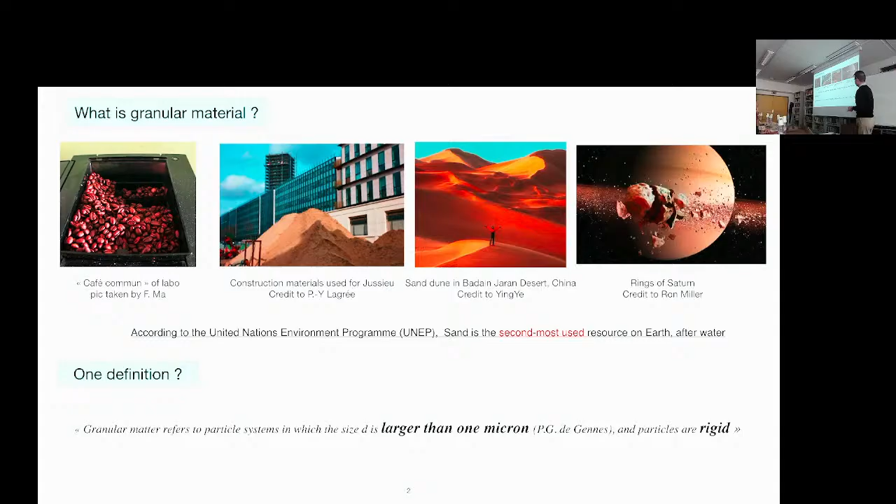Effectively, the interaction of a particle system may depend strongly on the particle size. For particles smaller than 1 micrometer, thermal Brownian motion is pronounced. For larger particles such as powders, clay particles, and flour particles, we have adhesive attractive interactions such as the van der Waals force and electrostatic force. And for even larger particles, as I showed in this picture, we have contact forces such as friction and the repulsive force. And also, we cannot neglect the weight of the particles.

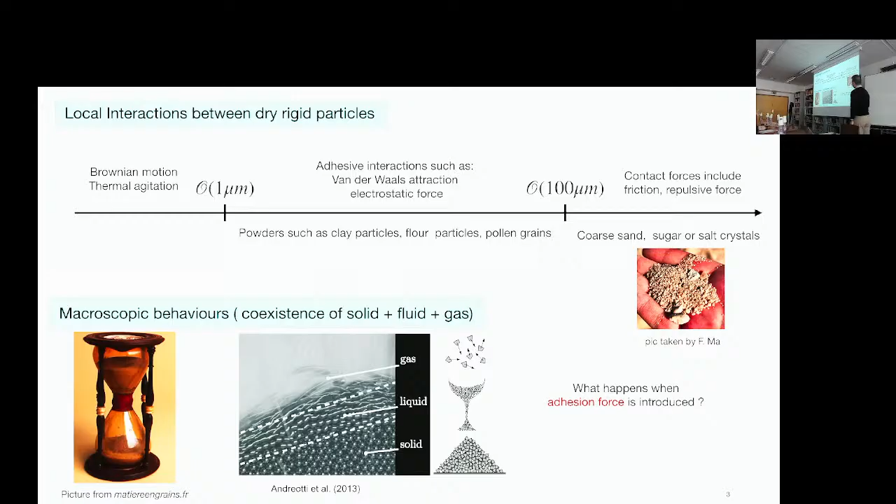In terms of macroscopic behaviors, one important feature of a granular material is that it can flow. It can behave like a solid, gas, or liquid according to the external conditions. Here, I show a very classical example: the flow of beads over an inclined plane, over a sand pile. From the top to the bottom, we can see they behave like a gas, highly agitated; in the middle, they rearrange and move as a liquid; and at the bottom, they form a solid, and the shape doesn't change. Naturally, we can ask the question, what would happen if we introduce the adhesive force?

First, let's talk about where sticky grains may come from. Just like I said, we have the van der Waals force and intermolecular attraction between the particles. But the amplitude of this van der Waals force may decrease dramatically as the particle size increases. Another more common mechanism to introduce adhesive force is the capillary force, due to the presence of a capillary bridge between the particles. We can parameterize the capillary force by the surface tension, the radius of the grains, and the geometry of the capillary bridge.

And more recently, we have Gans et al. They fabricate adhesive beads by coating spherical beads with a polymer. In this way, we can fabricate a temperature-independent cohesive system, and also we have a homogeneous adhesive contact network. In our work, we characterize the local adhesive strength by the granular Bond number. It is a non-dimensional number comparing the adhesive force to the weight of the particles.

In terms of macroscopic behavior, if we take solid sand piles, due to the presence of the adhesive force, we can see an increase of the repose angle, which coincides with the increase of yield shear stress. And for granular flows over an inclined plane, as we increase the adhesive strength between the particles, we can first notice that the maximum velocity the flow can reach decreases as the adhesive force increases. And also, a plug region with zero shear can appear.

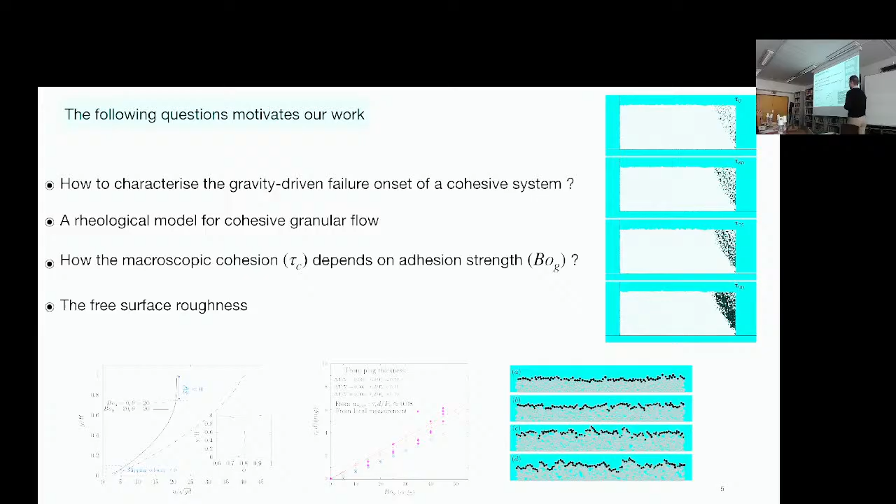For the rest of this presentation, I will develop my work as follows. First, I will introduce our numerical method, followed by two parts addressing the mechanical behavior of cohesive granular material at the solid regime and fluid regime. And finally, conclusion and perspective are given at the end.

We use a discrete simulation method in our work, namely the contact dynamics method. Unlike another method, namely molecular dynamics, in our method the particle overlap does not enter into the contact model, and the contact forces are resolved with an implicit contact law. For instance, we use the classical Signorini contact law. It gives all the admissible normal contact forces. It states that a positive normal contact force only exists when the contact velocity is 0.

And the bounded Coulomb friction law gives all the admissible tangential contact forces. And you may notice here, these two contact laws give an infinite number of admissible forces. So we need to select the forces which are compatible with the dynamic equations. Here I illustrate the idea using a frontal collision problem.

At instant t, at the beginning of the time step, we detect a contact between two particles. At the end of the time step, the contact opens. Writing the conservation of momentum equation on the contact frame, we can relate the normal contact force to the variation of the relative velocity. But please note that we cannot use this equation to decide directly the contact force, because in our problem, the relative velocity after the time step is still an unknown.

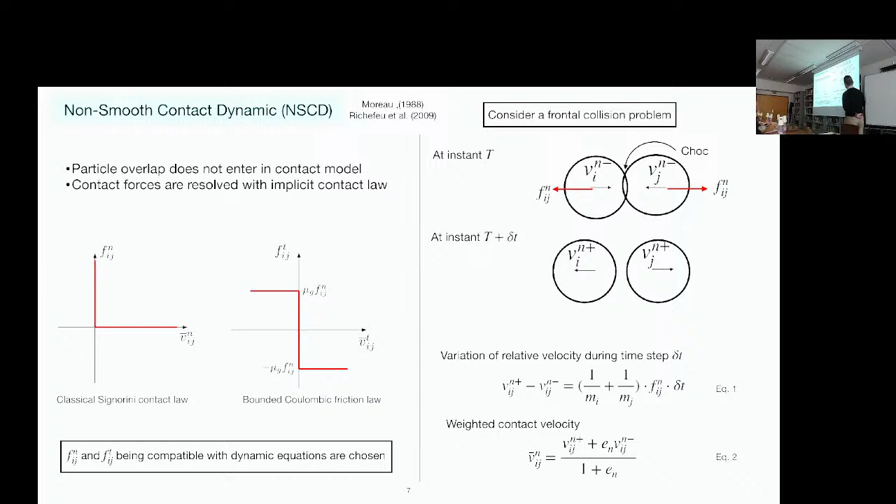So the contact dynamics method defines a weighted contact velocity, combining the pre and post relative velocity, weighted by a normal restitution number. If we inject the second equation into the first equation, we can relate the normal contact force to the normal contact velocity, and it is an affine function. Similarly, we can relate the tangential contact force to the tangential contact velocity.

If we plot these two affine functions on our contact law, then the intersection with the contact law gives us the contact force. For instance, for the normal contact force, if A n is positive, then we have a positive contact force. If A n is smaller than 0, then the normal contact force is 0. To introduce the adhesion force in our contact, we shift the Signorini graph to the negative value to allow the negative force to be selected. Besides, we defined a rupture length that allows the adhesive contact to persist even when the physical contact opens.

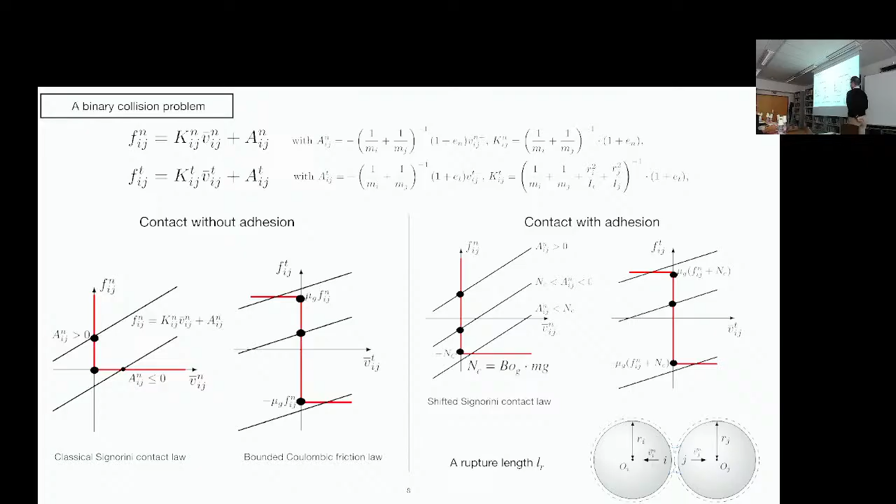In reality, we deal with a multi-contact problem. The solution of the force is similar. Just when we write down the conservation equation, we should consider all the other contacts with particle i. And as a result, we should incorporate all the contact forces with particle i into the coefficients A n and A t. And finally, the solution of the contact network is converged with the Gauss-Seidel iteration method.

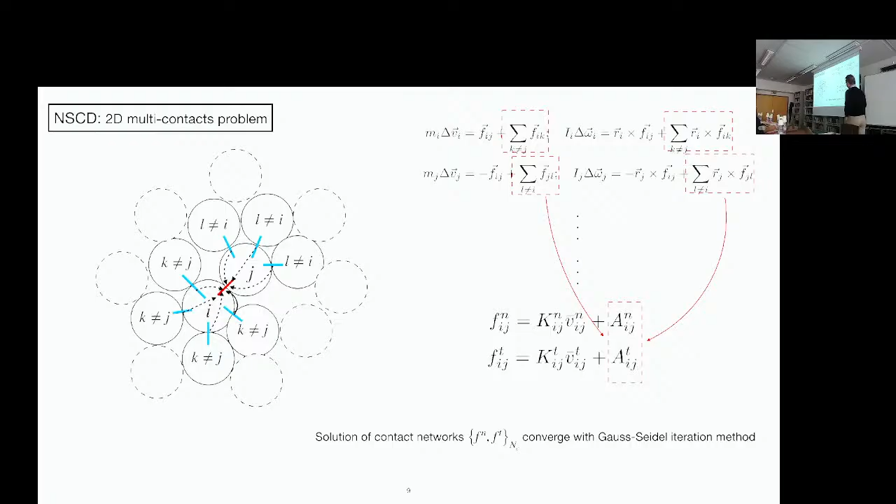So in the first part of our work, we try to explore the gravity-driven failure onset of a cohesive step. Here, I show the initial state of our numerical configuration. The system's initial state is constrained by a right-hand vertical wall. Once we remove the right-hand wall, the system begins to evolve and collapse under gravity. Some relevant system parameters are shown here.

We recall that we resolve the normal contact force with a shifted Signorini graph, where Nc characterizes the maximum value of the adhesive force, and Nc equals Bond times mg. Besides, we have three initial states with different particle size distributions to prove the reproducibility of the measurement results.

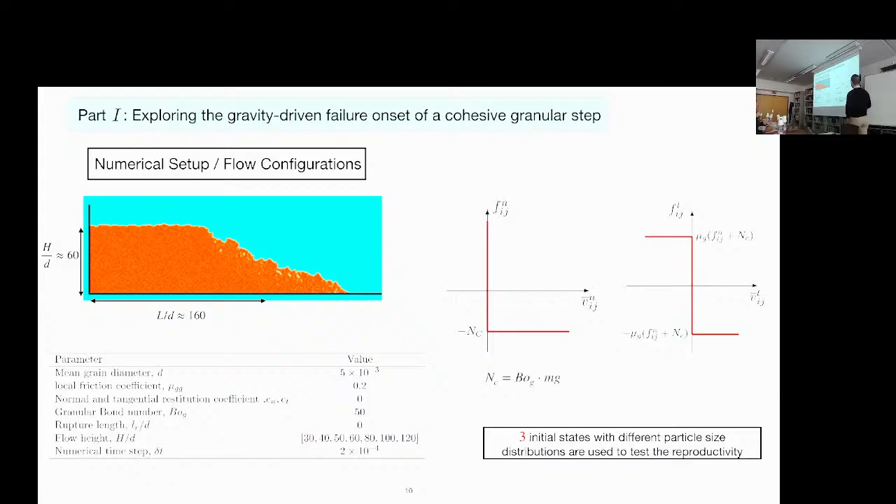Here I show different snapshots of the system taken at different times, and the particles with velocity larger than the system mean value are colored in black, and for the rest of the particles, a linear color scale is set. At the very beginning, we can see that no evident deformation happened, but the system presents a uniform velocity distribution that proves the existence of the diffusion motion.

And in the course of time, the localized grains appear in the right upper corner of the system, coinciding with the particles which have higher velocity than the mean value. At the end, the system returns to the static state, and the diffusion motion appears again due to the rearrangement of the particles.

So from here, we observe that in the course of the system evolution, the diffuse motion and the localized motion coexist. If we want to establish a displacement-based criterion to detect the failure onset, we should define a displacement threshold, capital RTH, to distinguish them. Before we develop the analysis, I will show here some definitions we will use later.

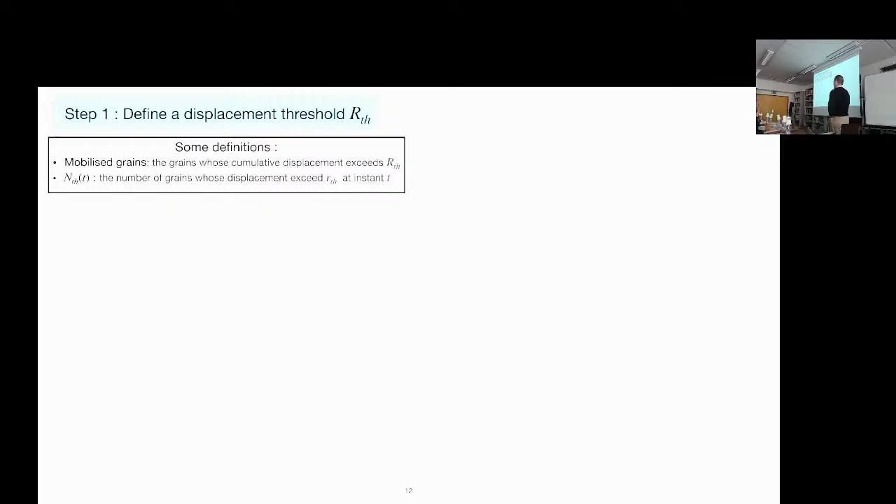First, we call mobilized grains the grains whose cumulative displacement exceeds capital RTH. And NTH is a function of time. It describes the number of grains whose displacements exceed a certain value, which we note here as small RTH.

If we take a system of height 60 grain diameters and Bond number equal to 50, we plot the evolution of NTH in the course of time with different applied small RTH. You can notice that NTH increases dramatically at the beginning, meaning the system is mobilized, and after a certain time, the system relaxes and the value of NTH saturates to a certain value.

Of course, another highlight to note is that NTH decreases systematically as we increase the value of RTH. That means there are fewer particles that exceed a larger displacement. If we plot the NTH at the end as a function of all the small RTH we used, there are two points we can highlight from this curve.

Firstly, the dramatic decrease at the beginning. That shows that the particles with small displacement are rather sensitive to the increase of RTH. And after a smooth transition, the curve saturates and converges to a constant value around 1 grain diameter. That shows that the particles which displaced over 1 grain diameter have more chance to develop the failure.

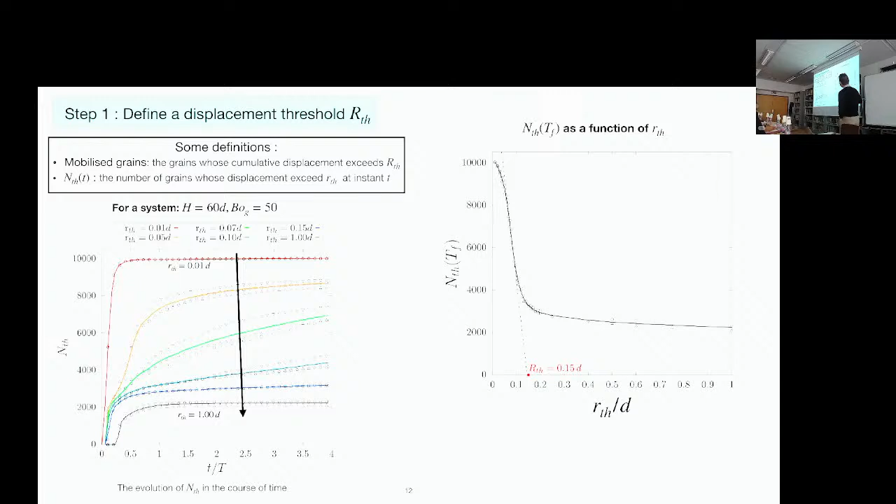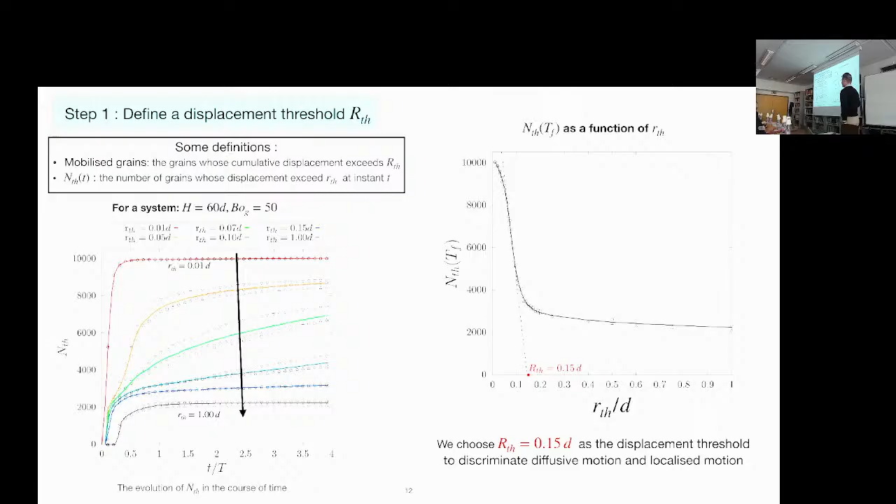If we examine this curve and choose the value where all the diffusion motion disappears, we can have capital RTH equal to 0.15 d as the displacement threshold to discriminate the diffusion motion and the localized motion. With this threshold defined, we can characterize the chronology of the system failure. Again, I will give some definitions of the values we will use.

First, we call delta NTH the increment rate of the mobilized grains number at instant t. Delta NTH max is the maximum value that delta NTH can reach during the evolution. And tau z is the instant when delta NTH undergoes a decrease of z% of delta NTH max. We take the same system with height 60 grain diameters, and again Bond number equal to 50. We can plot the curve of delta NTH in the course of time.

Shortly after the system starts, delta NTH reaches the maximum value at tau 0, and the evolution of this curve is short. That means that after a short time, the system stabilizes, and no more new grains are mobilized. If we plot the mobilized grains at different instants, we can find that the mobilized grains located in the right upper corner of the system form a linear failure plane.

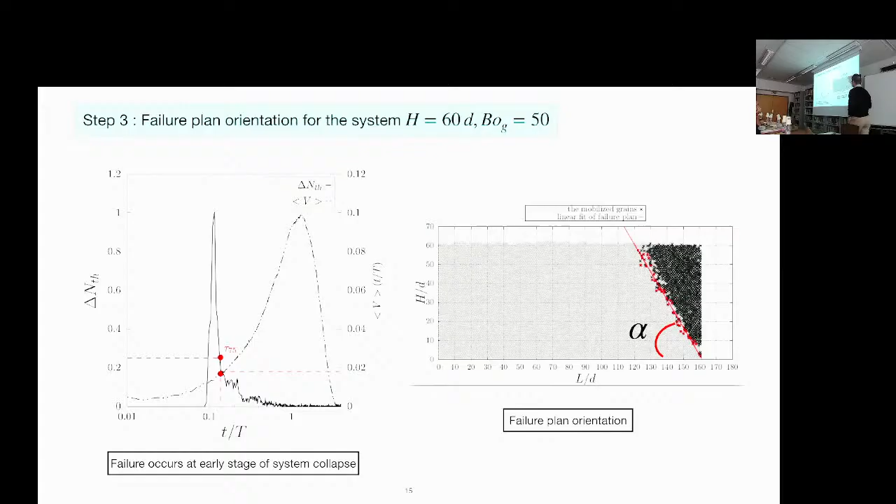For the next, we applied our criteria to the system with different height. We noticed that the failure angle alpha is decreased systematically as we have a larger system. This result is qualitatively consistent with the experimental measurements.

In fact, the objective of measuring the alpha angle as a function of height is that we want to investigate the relationship between the adhesion and the internal friction angle. But before doing that, we need to test the reliability of our criteria.

As you can see, all the criteria are established by taking a unique system with a unique height. It is reasonable to wonder if we can do that for the system with different height. So we test the reliability of our criteria on the system height.

Here we plot the displacement distribution of the system with different height, and we found that the RTH effect is highly sensitive to the system height. If we plot the failure angle using different criteria found with different height, we find that there is rather a large dispersion shown in the measurements.

But the dispersion shown in the data due to the different criteria is smaller than the dispersion of the measurement due to different choice of the initial state.

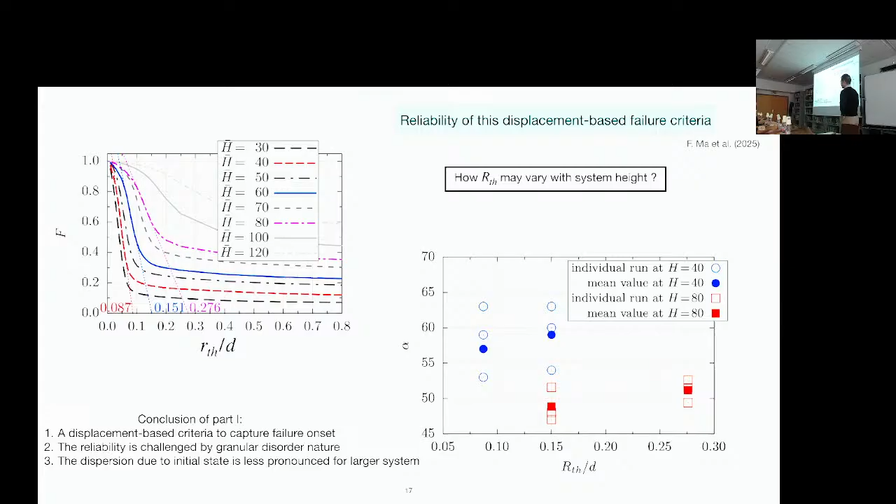So in the second part of my work, we're interested in the granular flows over inclined plane. Here I show two examples of cohesive granular flow in nature. One is a mass just detached from the mountain, and a cohesive flow is initiating. And the other one is a snow avalanche along the mountain. We can see the roughness motif form on the free surface.

So there are three questions we want to address in this part. We want to discuss rheology to capture the kinematic aspect of the cohesive flow. We want to relate the macroscopic cohesion strength τ to the local adhesion strength characterized by the bond number. And we also study the free surface roughness.

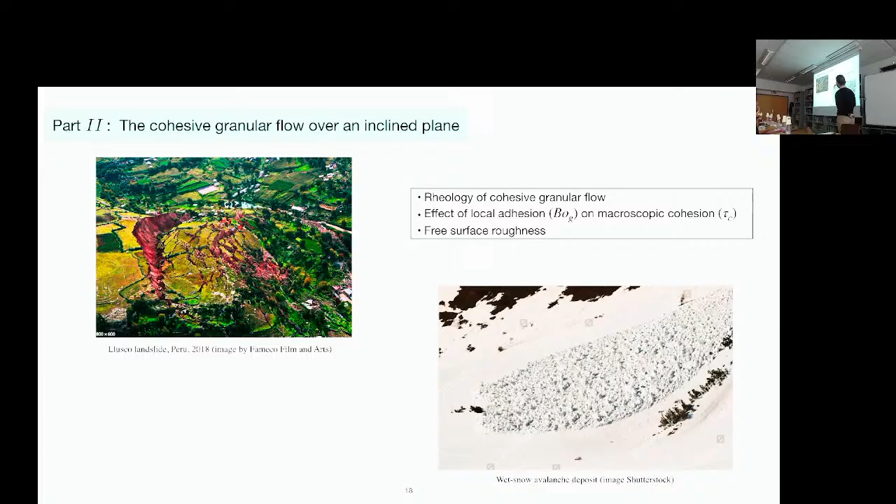So I show here the numerical setup we're going to use in this work. For this part of work, we focus on the steady uniform state of the flow. Remember that the normal contact force is solved with the shifted Signorini graph, and the maximum adhesive strength is characterized by N_c equal to Bond mg. Besides, we set a really small rupture length to stabilize the adhesive contact.

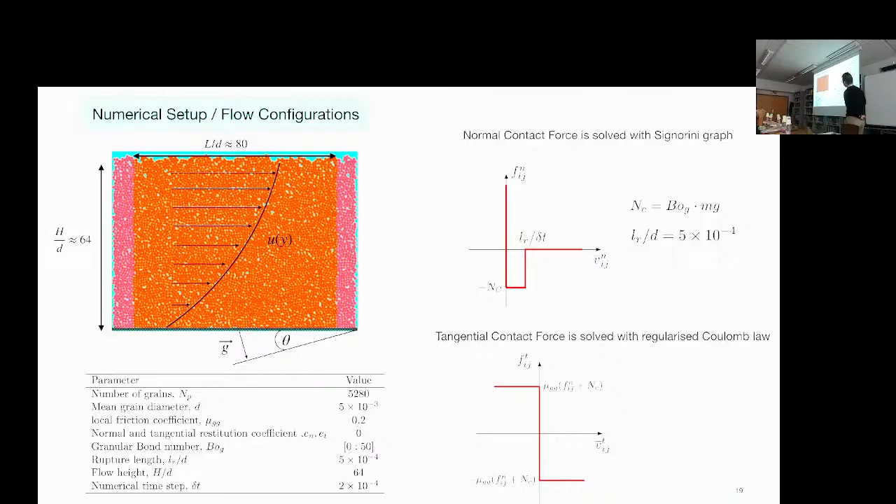A more advanced understanding of dry granular rheology is the mu(I) rheology. It states that the friction in the granular flow can be described by a Coulombian friction law, τ equals mu(I) multiplied by the normal stress. And the friction coefficient mu is a function dependent only on the inertial number. Here I show the definition of the inertial number.

Through numerical and experimental measurements, we find that mu(I) can be described by an affine function depending only on the inertial number. So the first idea is to verify through our numerical method if we can reproduce this friction law.

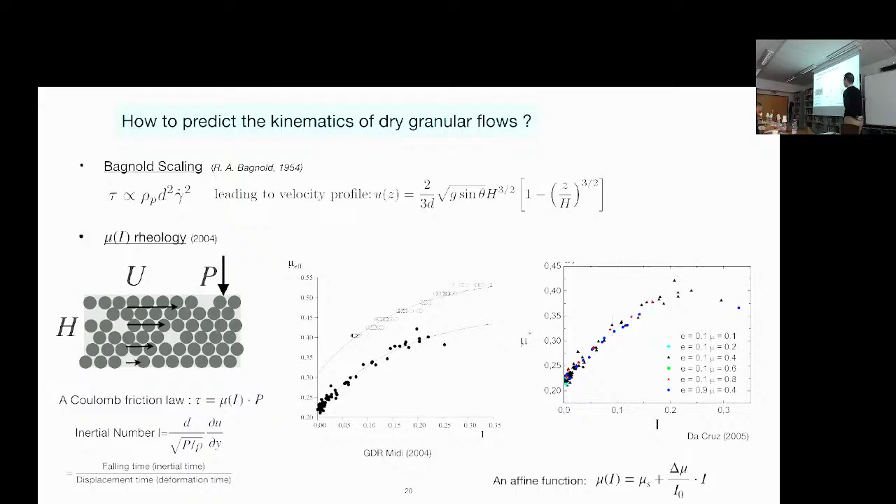So first, for a dry uniform steady flow, we have at each depth in the flow mu(I) equal to tan theta. And if we plot the profile of the inertial number for the flow with different slope angles, we find effectively that I is constant in the bulk of the flow, except the two boundary regions.

If we plot mu(I) given by tan theta as a function of the inertial number, we effectively find a linear friction law verified by our discrete numerical simulations. From this linear friction law, we can calibrate these two frictional parameters.

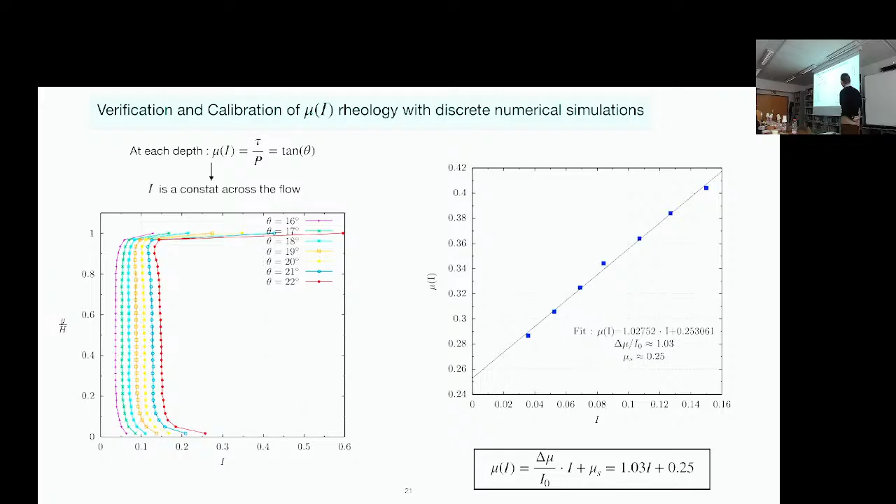Another way to verify our numeric method is we can derive the velocity profile for a flow over an inclined plane. And here I recall simply the procedure to find the velocity profile for a flow over an inclined plane. We can find in the expression of the velocity profile, it indeed depends on the two frictional parameters we just calibrated from our discrete simulation result. If we compare our numerical simulations to the theoretical solution, we can find that rather good agreements can be obtained.

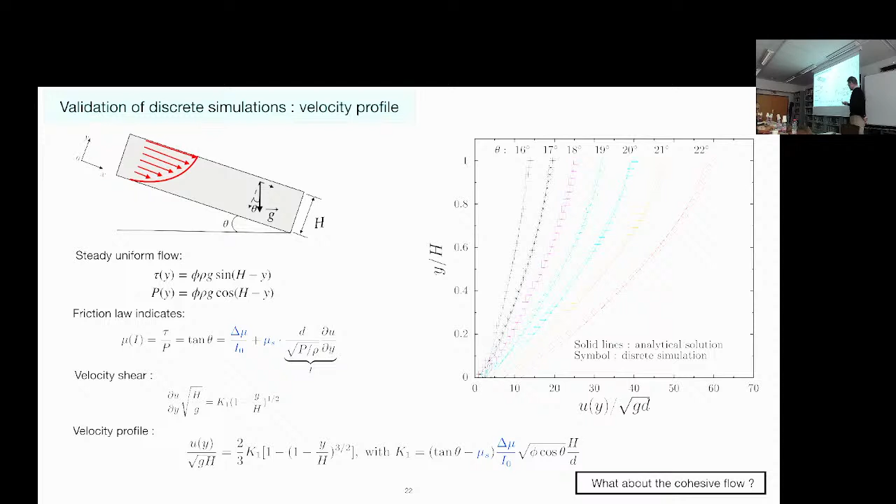And the question is: what's the role of the cohesion in this problem? For modeling the cohesive granular flow, we describe this material with a cohesive Coulomb model, saying that the shear stress is a linear combination of the Coulomb friction and the macroscopic cohesive stress. And at this stage, we assume the independence between the cohesion and the friction. These two points, we will verify later with our simulation results.

And for a steady uniform flow, we have the shear stress and the normal stress compensate the projection of the gravity over the inclined plane. And we can relate the tangent theta to the friction coefficient and the tau. Starting from this equation, we can find the velocity shear. It should be noted that there exists a critical height where the velocity shear equals 0. And if we integrate the velocity shear, we can obtain the complete velocity profile.

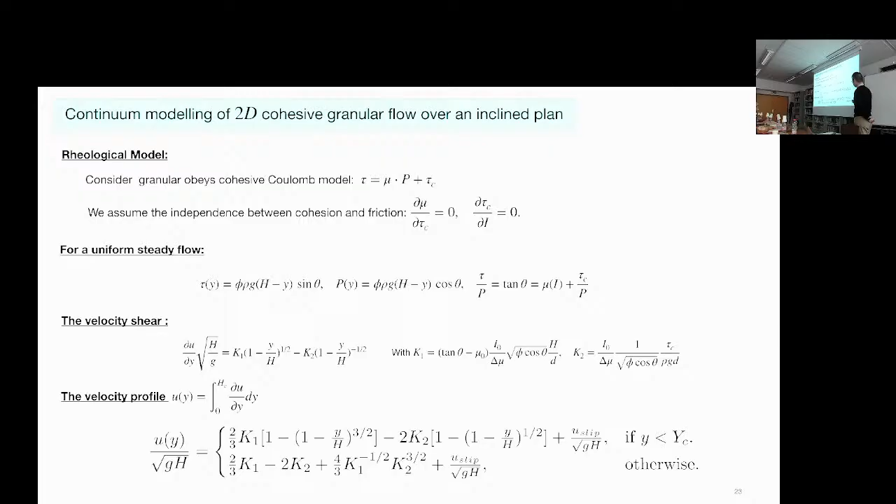But please note that the modeling of this cohesive granular flow depends on two assumptions. One is a linear rheological model, and the second is the independence between the friction and cohesion. And now we will verify these two assumptions with our simulations. The first point consists in verifying the linear rheological model. So if we take a flow with a certain bond number, the uniform steady flow can be established on different slope angles.

Then given an inertial number, we have a different position where this inertial number can be reached. This allows us to plot the shear stress as a function of the normal stress. We can find that in this curve, the gradient gives the friction coefficient, and the intersection point gives the tau. So we have proved that the shear stress is an affine function of the normal stress, from which we can verify our first assumption of the modeling.

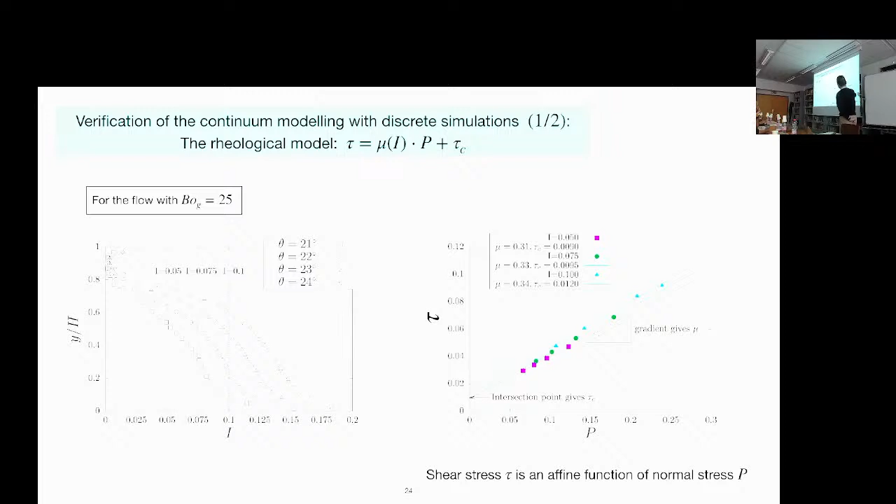The next point consists in verifying the independence between the friction and cohesion. We repeat what we did for one single bond number. We take the flow with different bond numbers, then we can plot the friction coefficient mu as a function of the inertial number. We can find that the data of different bond numbers collapse on the same curve, which we obtained by the calibration using the non-cohesive flow.

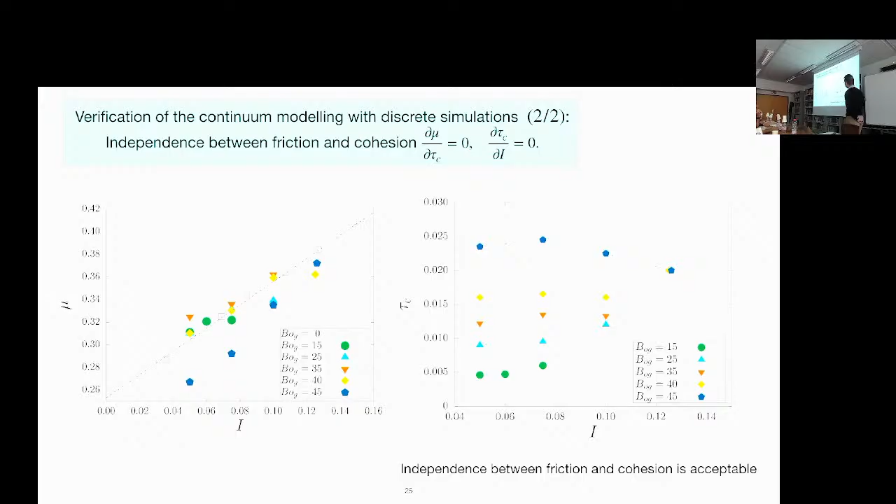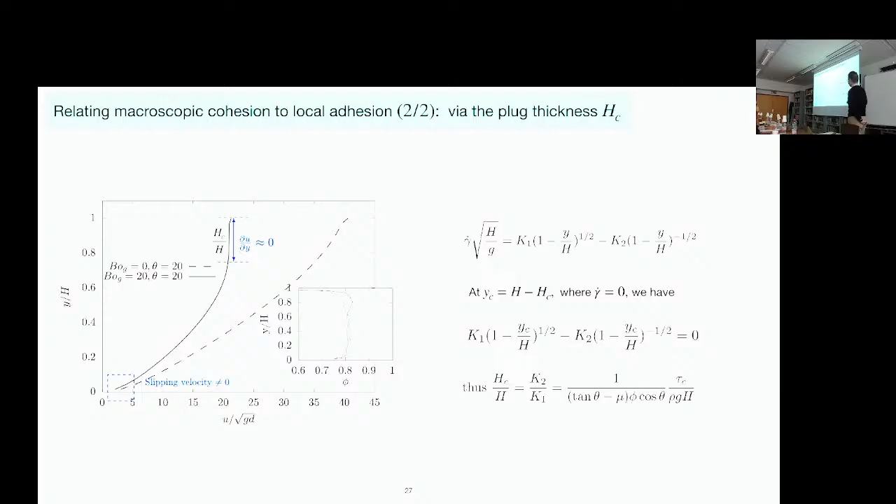If we take a velocity field of the numerical simulation, we can say effectively there is a region where velocity shear equals 0. But the interface between the plug flow and the shear flow is not sharply defined. So we need a cutoff value for the relative variation of velocity to conduct the measurements.

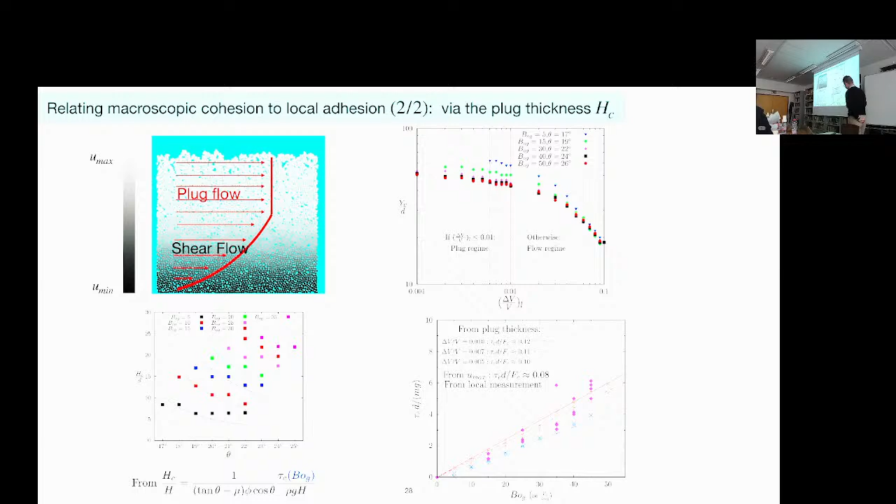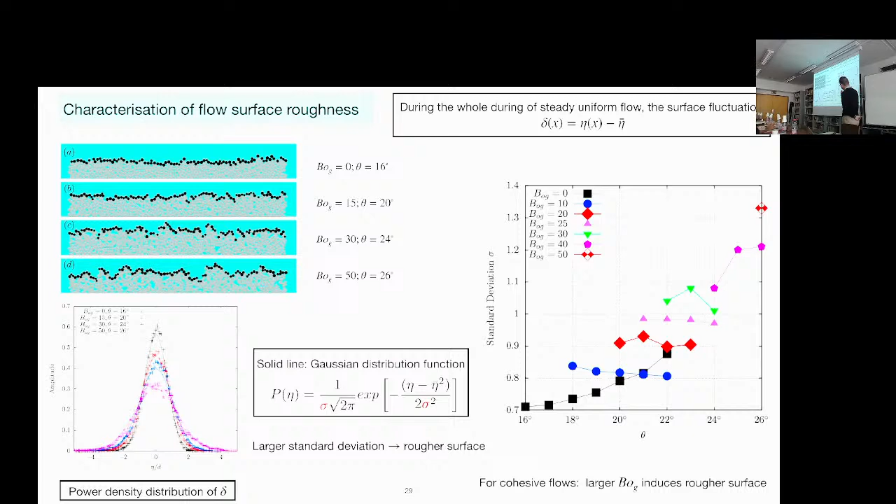And here I can draw some conclusions of the second part. During the second part, we proposed a simple rheological model using the classical definition of the inertial number I, and we tested it with our numerical results. And from this rheological model, we can describe analytically the kinematic aspects of the flow, such as the maximum velocity and the thickness of the plug. And the theoretical result allows us to measure the system macroscopic cohesive stress as a function of the local adhesive stress, and consistent results are obtained.

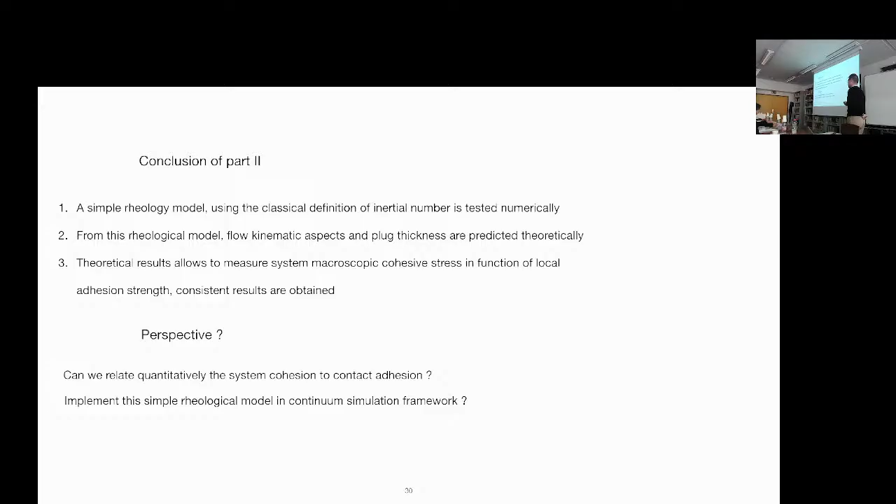And following this conclusion, we can propose two perspectives. One is, can we relate quantitatively the system cohesion to contact adhesion, and we can try to implement this simple rheological law in a continuum numerical simulation framework.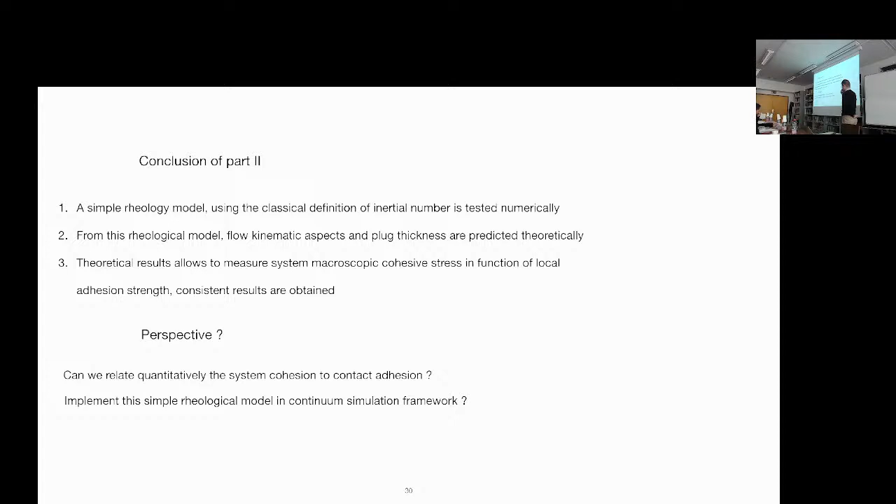So for the second point of the perspective, we use the Saint-Venant multi-layer solver in Basilisk. Here I recall briefly the simplifications we used to arrive at the system we're going to solve. First, we took the full 2D Navier-Stokes equations and we applied the thin layer approximation, seeing that the variation in the longitudinal direction is much larger than the variation in the transverse direction. And we obtain the reduced Navier-Stokes Prandtl equations.

And then we integrate it over the fraction of the height to obtain the system of equations we have to solve. Here, alpha is a profile factor. It is legitimate to take it equal to 1 if we have a thin layer in the system. And the blue term is the difference of shear stress between the upper and the lower interface of one layer. Here, according to the different flows we considered, we can write the expression of the shear stress according to the rheology law. Here, we're going to test if we can implement this locally defined rheology in this multi-layer solver.

So the effective viscosity can be written as the following according to the different rheology of the flows. And the diffusion problem can be solved by these equations. And if we rearrange the different terms, we can arrive at an equation which we can write in matrix form. And this matrix form can be solved by the Thomas algorithm. Here I show a simple

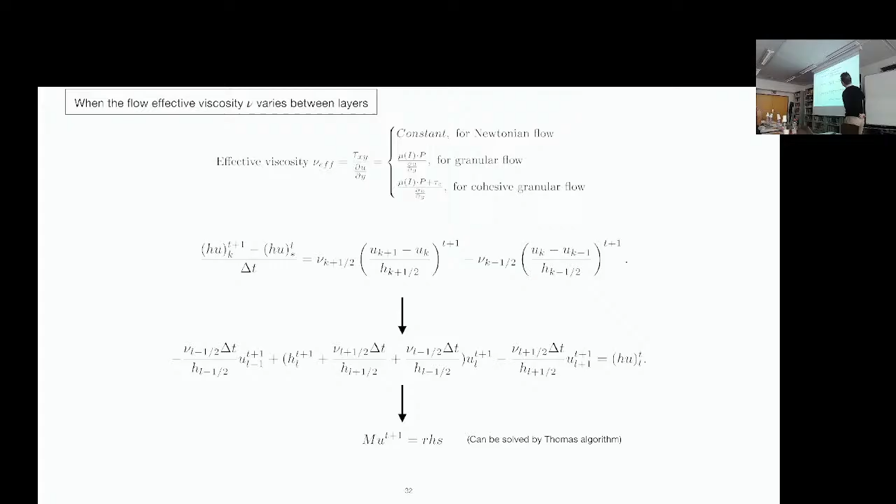test case. I implement the granular flow mu(I) rheology into this multi-layer solver. Here I show the flow established on different tilt angles. We can find a good agreement between the numerical simulations and the theoretical prediction. If we define the maximum error between the numerical solution and the theoretical one, we can find the error decreases when we increase the number of layers.

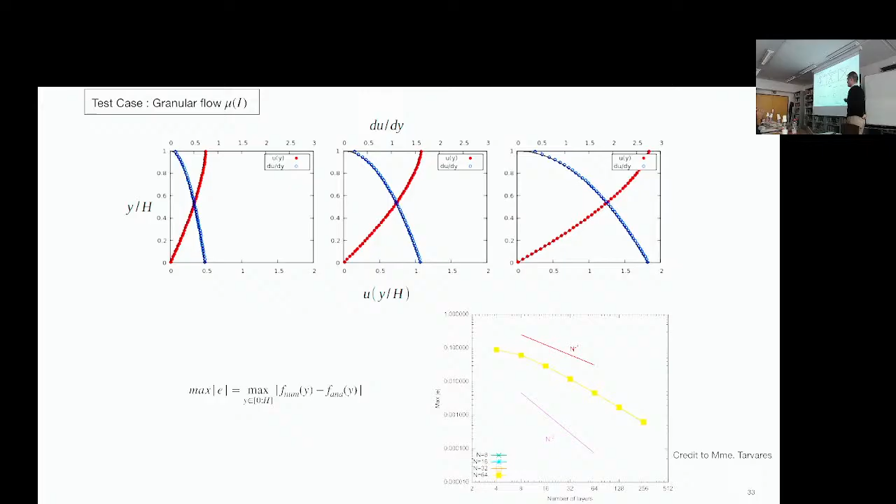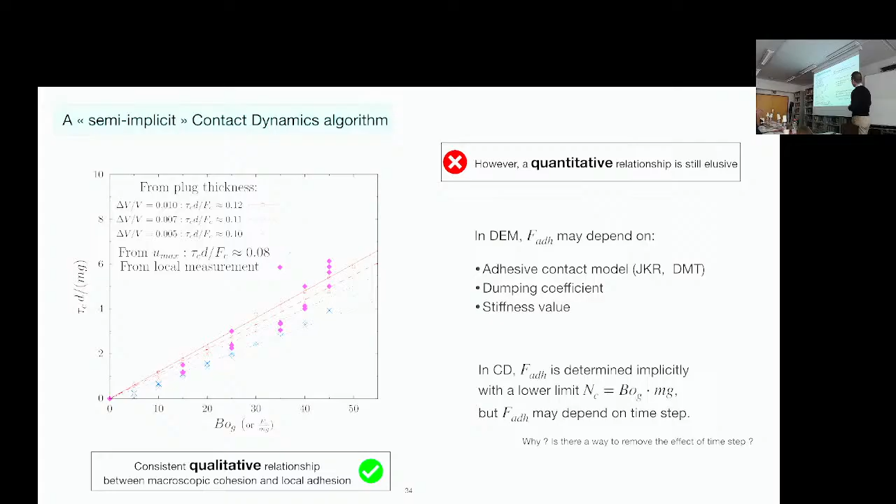And in contact dynamics methods, as the adhesive force is determined implicitly, it seems that we can avoid these troubles due to the numerous models for the adhesive force. But in our problem, the adhesive force may depend on the time step. I will explain why. If we retake the example, the frontal contact problem I introduced at the beginning, if we have N smaller than the lower limit NC, then in fact we impose the adhesive contact force. And in this case, the numerical time step cannot be cancelled out from the dynamic equations, which means that the variation of the contact velocity depends on the numerical time step.

The variation of the contact velocity would decrease if we have a larger numerical time step. That means an increasing effective cohesion as we increase delta t. Here I show the system mean velocity as a function of delta t. We can see that effectively the system mean velocity decreases as we increase the numerical time step. We try to

remove this dependence on the time step by implementing a semi-implicit approach, as we assume that the dependence on delta t comes from the lower limit we set in the Signorini graph. So we propose to solve the normal contact force with the classical Signorini graph, and we can see that the dynamic equation can be independent of delta t. And we treat the adhesive force as an external force, just like gravity. That means that we subtract this NC from the resultant force of each grain in the contact.

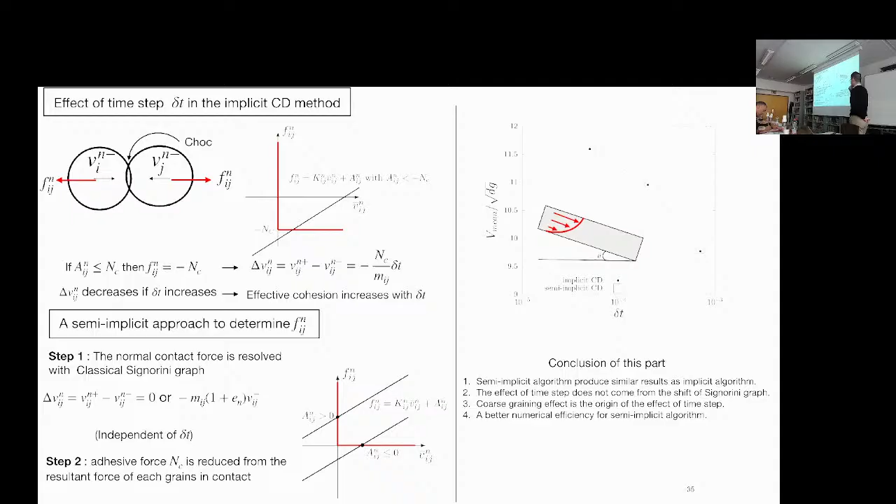So at the beginning of this presentation, we asked some questions, and now we try to answer them. So how we can characterize the gravity-driven failure onset: we discussed the possibility of a displacement-based criterion to detect the failure onset, but we meet the inherent difficulty due to the disordered, non-homogeneous system that we have here. And a good agreement between the theoretical modeling and the numerical simulation motivates us to implement it in more effective continuum simulations.

And how the macroscopic equations may depend on the adhesive strength: we got a consistent qualitative linear relationship irrespective of the kinematics. And we found that the adhesive force carries the signature of the cohesive strength from investigating the free surface roughness. More work should be done in the future.

We need to explore more about the semi-implicit algorithm and the implicit algorithm to better understand the effect of time step. And we may study the slipping velocity for different bottom surfaces and try to implement it in continuum simulations. And finally, we can try to use a continuum simulation to model the front of a cohesive avalanche.